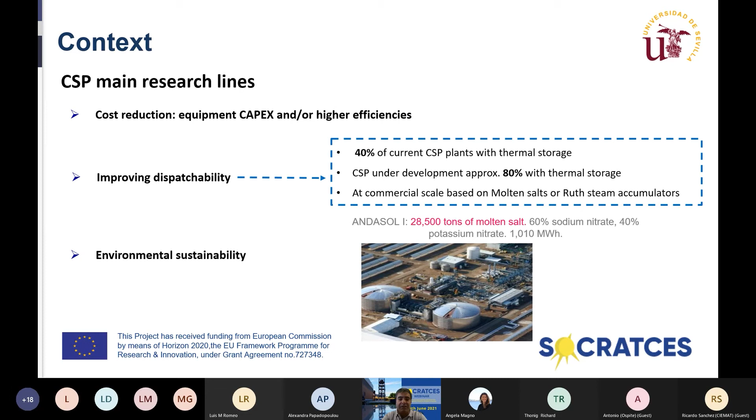So the main CSP research lines are cost reduction with capex reduction of equipment, and also obtaining higher efficiencies, improving dispatchability with energy storage, and increasing the environmental sustainability of the plants.

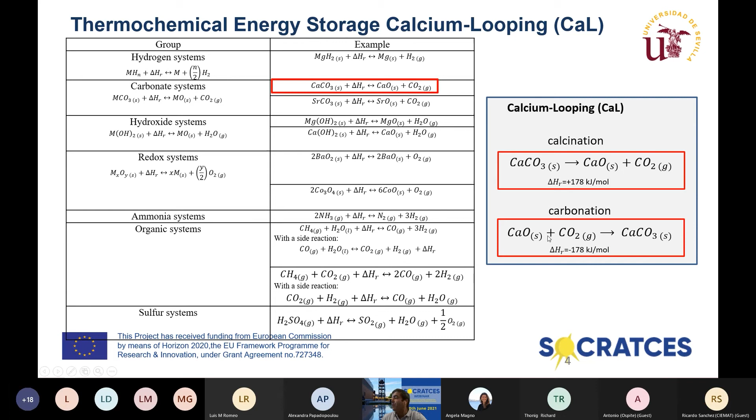Within energy storage systems based on thermochemical energy storage, there is a number of different technologies, not all presented here. In this project we consider calcium looping, based on the decomposition of limestone, calcium carbonate, into calcium oxide and carbon dioxide. Energy is stored in the chemical bonds, and when heat is required, by mixing these products, heat is delivered to form calcium carbonate again.

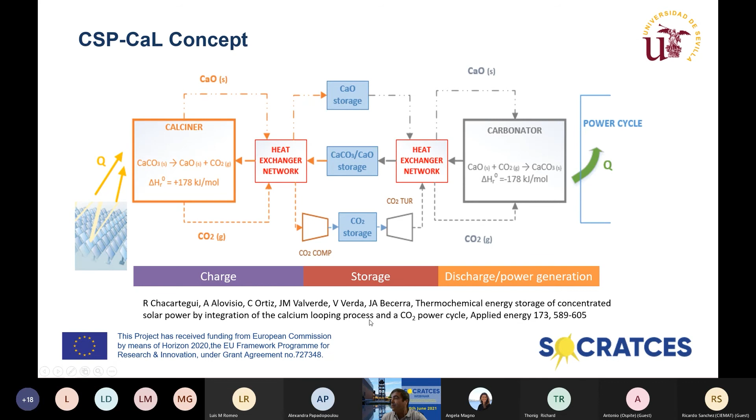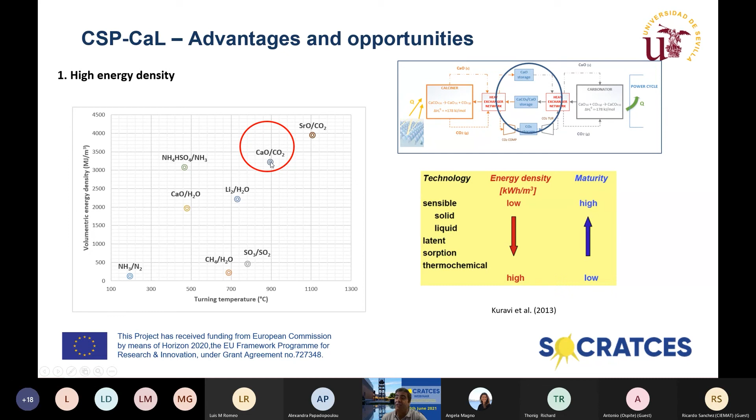Which are the advantages of calcium looping applied to concentrated solar power? It has this pair calcium oxide, carbon dioxide, with high volumetric energy density at a high turning temperature. This is a challenge, but at the same time an opportunity. It allows different strategies for solid storage at different temperatures.

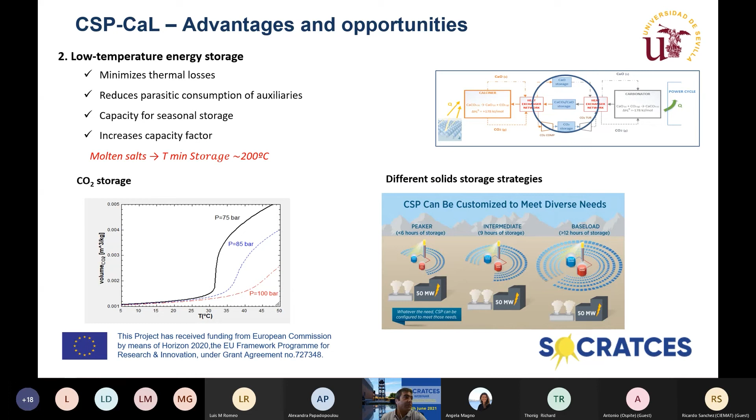If ambient temperature is used, thermal losses can be very low. It allows capacity for seasonal storage. It hasn't the problem that can arise in one of the most extended commercial applications, molten salts.

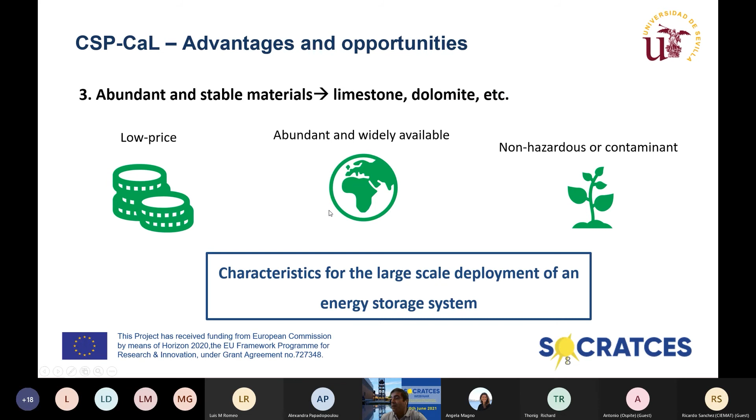One of the stronger points of the concept is that it's based on very abundant and stable materials, some of the most abundant on the Earth's surface. So they have low price, are abundant and widely available, and are relatively non-hazardous or non-contaminant. The materials we are considering have the characteristics for large-scale deployment of energy storage systems.

Besides, at the level of heat delivery, very high temperatures can be obtained depending on the operation pressure. In our project we are considering only atmospheric, 1 bar pressure. It's a closed loop, but atmospheric pressure. Going to higher pressure and higher partial pressure of carbon dioxide, the turning temperature increases, allowing us to go to higher temperatures in heat delivery.

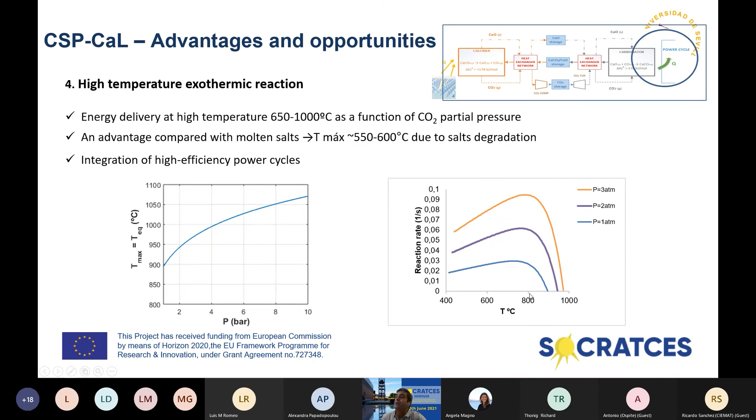The concept comes from the idea of looking for an energy storage system to integrate with supercritical CO2 cycles and high temperature cycles. It can be applied with direct integration, with challenges regarding particles and how it's integrated, and also with indirect integration, with challenges regarding how the heat is extracted.

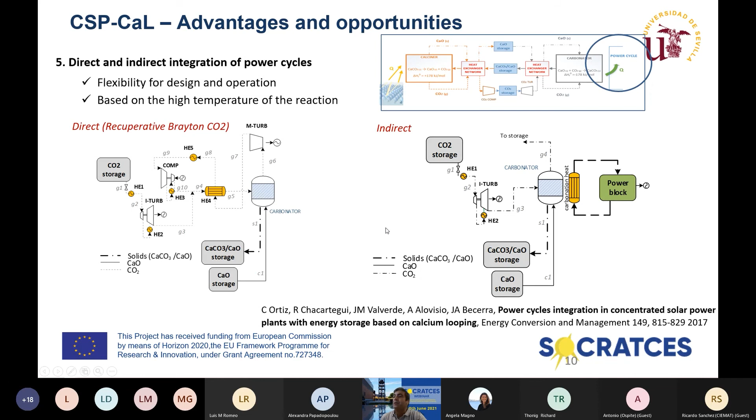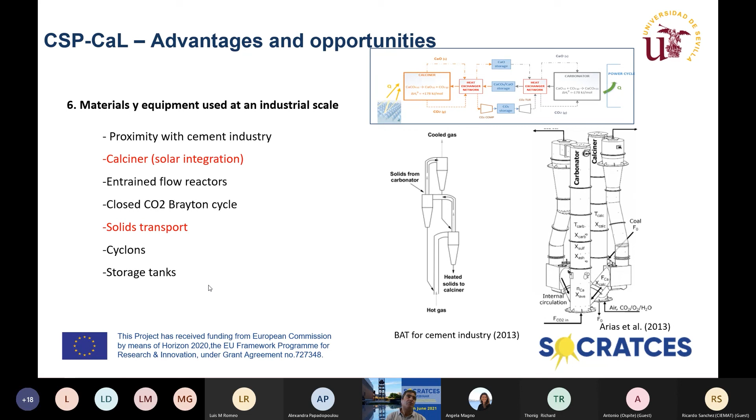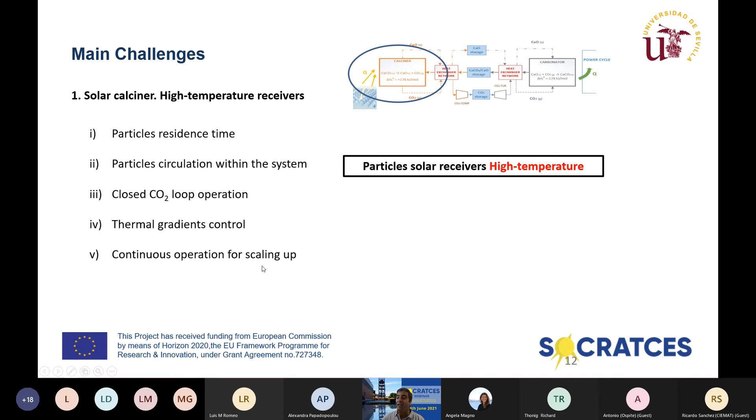Which are the main challenges identified? We have particle solar receivers at high temperature, and we consider this a big challenge. We try to contribute with this project, giving answers to open issues regarding how particle residence times and circulation affect thermal gradients, and which are the key points for scaling up to larger size applications.

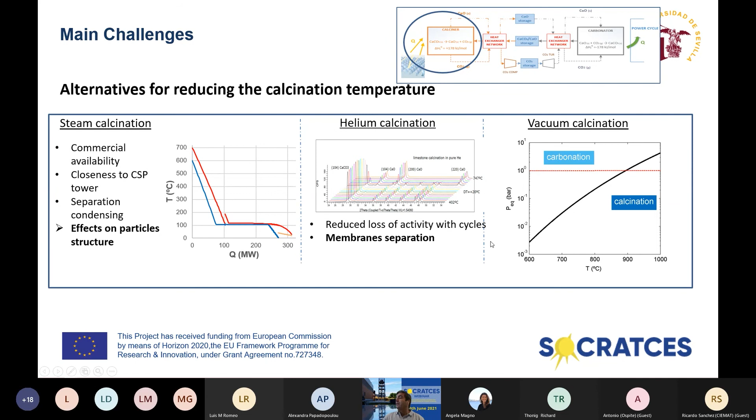We are studying how to reduce this calcination temperature by playing with the partial pressure of carbon dioxide. This is the same graph as before, but with changed axes. By adjusting the CO2 partial pressure, we can achieve higher carbonation temperatures and lower calcination temperatures. We can also use helium or steam to dilute the CO2, with additional challenges regarding separation and particle behavior.

Regarding the main challenges, we also have the behavior of multi-cycled calcium oxide conversion. Calcium looping has been more advanced in carbon capture, and these are the typical deactivation curves with the number of cycles. Related to this deactivation behavior, the flows of solids that must be dealt with are increased, penalizing the parasitic consumption and the global behavior of the plant.

We have identified that this deactivation is highly dependent on the design conditions of reactors, materials, and processes, and on pore plugging, and how the CO2 penetrates the surface and inside the material.

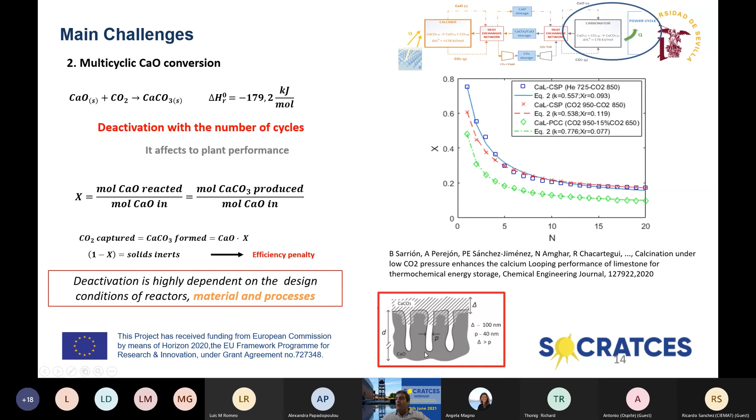Summarizing the main benefits of the calcium looping storage concept in CSP: as we said, abundant calcium oxide precursors, reactants and products can be stored at ambient temperature. Carbonation and heat delivery can be obtained at high temperatures, allowing high efficiency power cycles and gas turbines. The material allows high energy density to maximize storage capacity.

Equipment is available, or at least the knowledge is available, in widespread industries like cement.

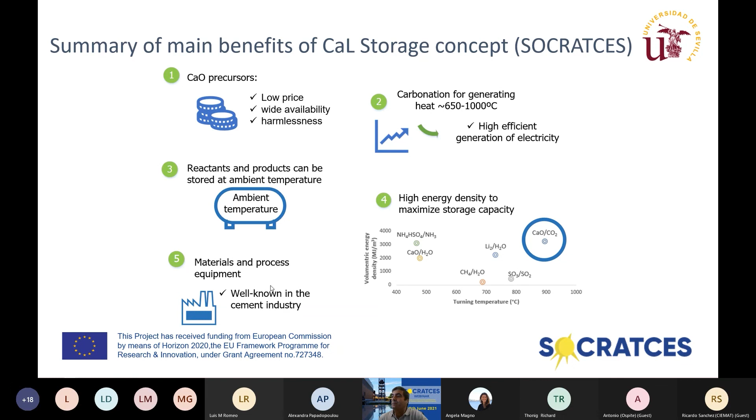In our project, we try to analyze how the materials behave, and how components must be designed. We don't try to make a beta system of a real plant, but to extract most of the information regarding the processes at the reactors, storage, materials movement, at different levels: laboratory level, reactor level, and potential for scaling up.

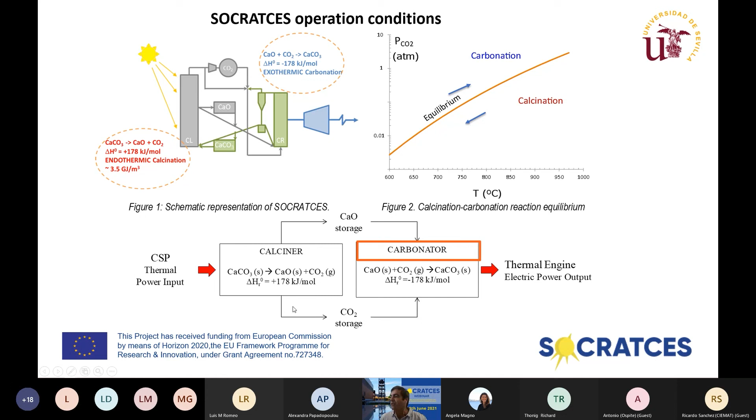One very interesting thing we identified at the beginning of the project: here you have the behavior of the deactivation of the material at carbon capture conditions, with CO2 concentrations around 15%. These are the typical conditions of a coal power plant at the source. However, we are operating in the CSP application.

We are considering closed loop circulation, so we have pure CO2, or if we add some additive or additional elements, in any case we have very high CO2 concentration, very high partial pressures. We have that the deactivation of the material changes completely, and here you see it's very good news for further development.

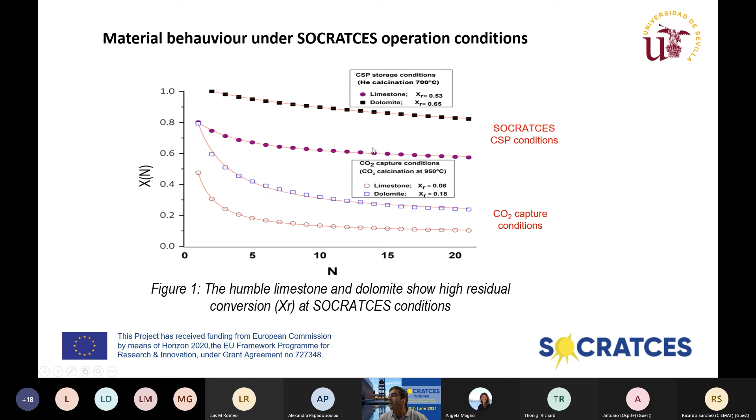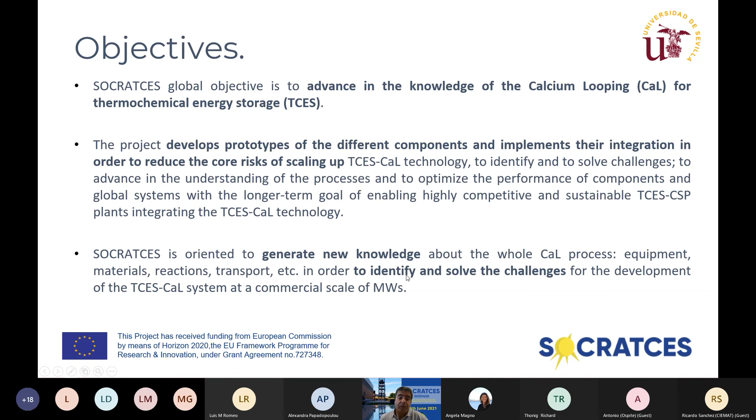The objectives: to advance in the knowledge of calcium looping for thermochemical energy storage, to develop prototypes of different components and implement integration in order to reduce the core risks of scaling up, generate new knowledge, and identify and, if possible, solve associated challenges.

We have partners working on new materials, or very old materials but analyzing their application, since limestone was applied more than 6,000 years ago. They analyze the reaction, how the operation, integration, and control should be, and how the systems are integrated. Everything is oriented toward scaling up, so it can be applied.

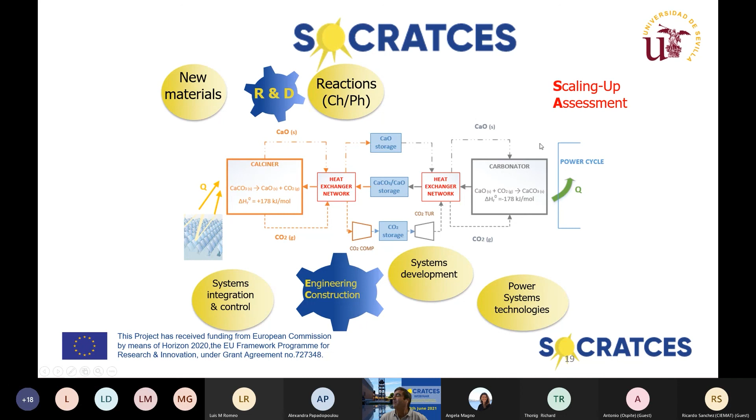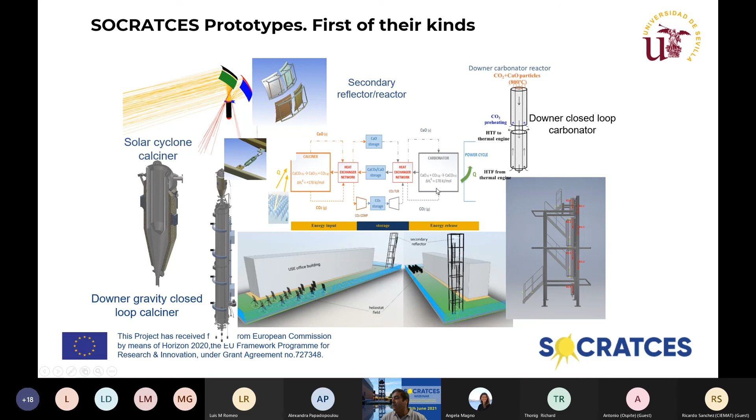We have developed, first of its kind, a solar cyclone calciner with a beam-down application in order to have enough temperature. We have a downer gravity closed loop calciner, an adjustment of this beam-down application, and an entrained flow reactor for the carbonator. All of these have been developed and installed at our facility here in the University of Seville.

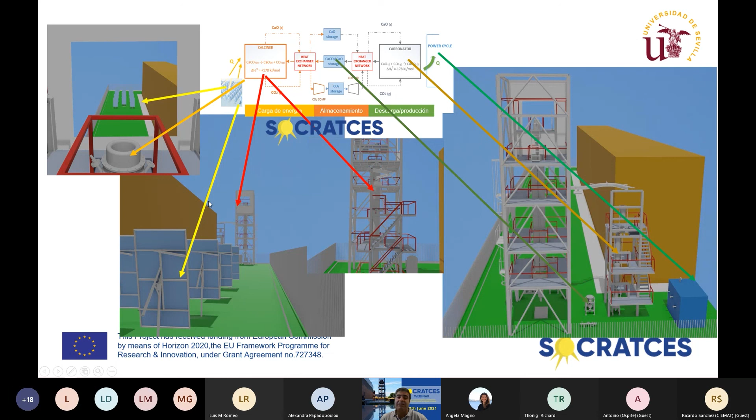Here you have some images. Each one is oriented to obtain specific information related to the behavior of the materials and components, and the challenges for the design. This is a low TRL project. Here you have some photographs of the place I'm currently at.

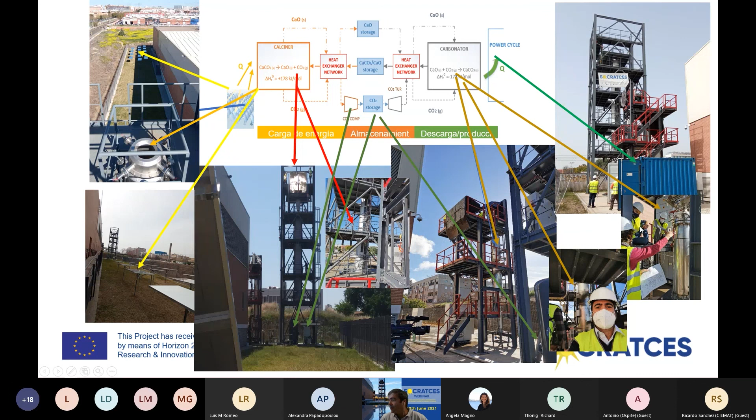Here you have the cyclone calciner, the entrained flow calciner by gravity. Here you have the carbonator. Here you have the power block, some details.

Related to this, we have produced data. This is a non-complete sample of published results in which different data are presented regarding integration and processes, materials behavior, components, the calcium looping perspective and challenges, and even some evolutions regarding the original concept, identifying opportunities for application in industry.

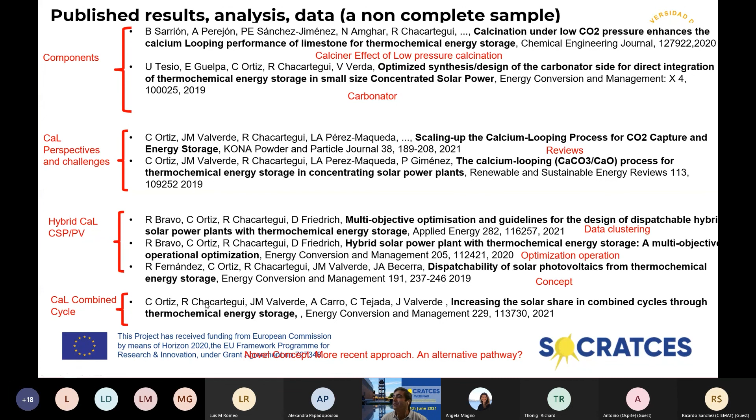Okay, and that's all from my side.

Thank you very much, Angela. Thank you very much, Ricardo. It's a pleasure, this is a very exciting project, and I think all the consortium has made a very good job. Thank you, Ricardo. One important thing is that Angela belongs to the SOCRATCES consortium. Okay, thank you, Ricardo. Well, now.